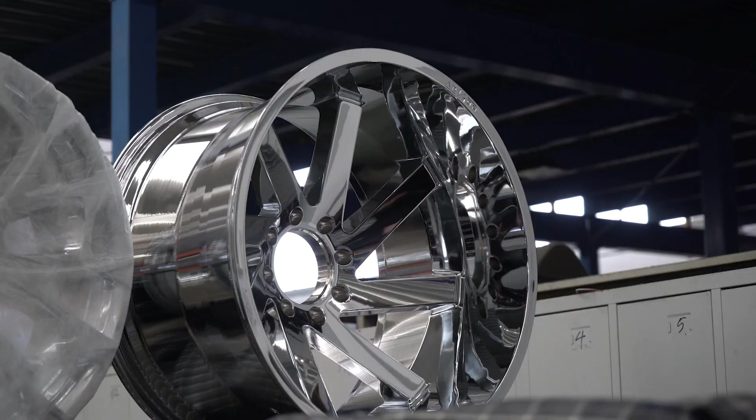My name's Sean Chartier, and I am the designer of the ARKON Lincoln.

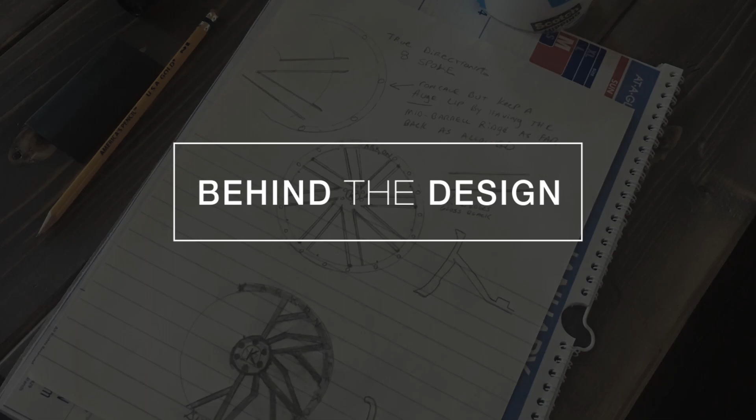Drawing wheels when I first started was a nightmare. I think I'd relate it to Homer Simpson when he drew his ideal car, because I took all the things I really loved, put them all in one thing, and looked at it and went, wow, is that a mess? I think when I stopped making it so complex and took all the things I loved in a wheel of what I wanted on my actual truck is when I was able to actually draw the clean lines of the Lincoln.

We started coming up with the concept of true directional, having them be a truly directional wheel. That's when I finally broke out of drawing like my 10-year-old son would, which is where I started, to where, as someone who's been around wheels for a decade, I was able to start creating something that people would like.

The Lincoln is built of a bunch of design components. I knew the big chunky wheels were the hottest, that people really loved the clean look, and it would match almost any kind of build. The directional was really important to me, so I wanted the directional spoke. The concavity was important to me too—I wanted that hybrid look.

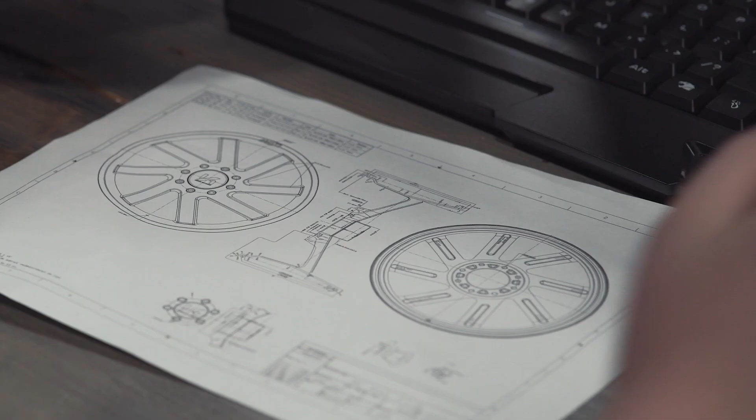But I think it all started coming together when I was able to lay it out flat, and then I did a side drawing, a side view, that gave it that bowl, that concave cup look. You can picture it in your head, but you can't get it on paper. I think that was the hardest part—taking what was in my head and actually getting it on paper. It took a lot of renditions.

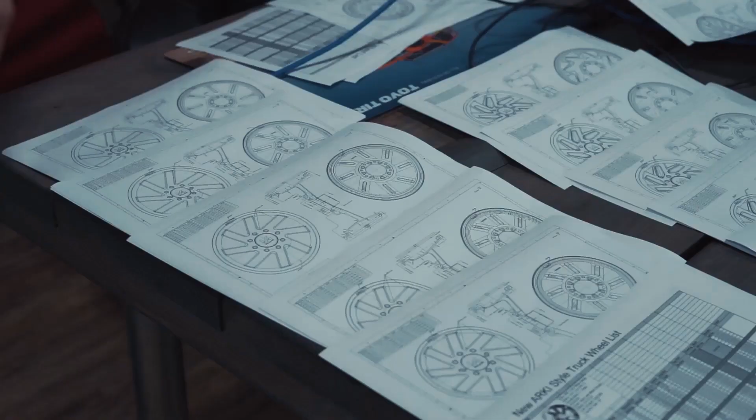I wouldn't show you my first ones, because it is really, really difficult to design wheels. The Lincoln was probably the fourth one I liked enough to send out and have 3D renders made. When the first one came back, I was like, yeah, heck yeah. And I showed it to other people, and they said, dude, that is ugly, that is the worst wheel ever.

So when this one came back, I called everybody in my office without even opening the email, because I had so much confidence in the sketch—I just had a gut feeling this one was finally going to be one to be proud of. I had everybody in my office, opened that thing up, put it on the 50-inch TV, and everybody said, yes, you hit it.

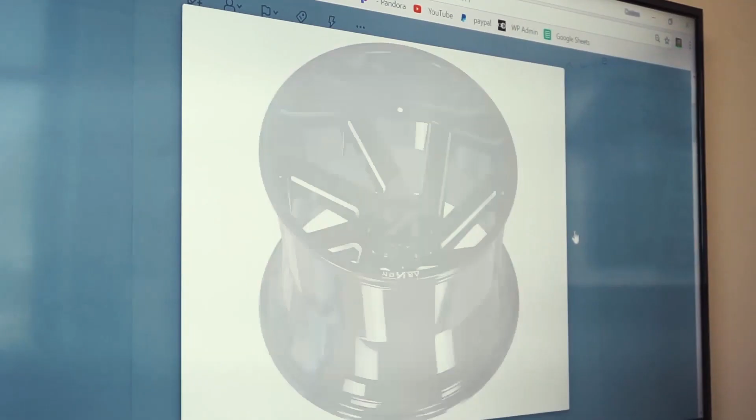When you design a wheel on a napkin, you don't have any rules to follow, so I designed it the way I wanted and sent it off. I had a little bit of concavity, but not a ton. I wanted the pass-through on the barrel so the lip looked like it went forever. When it came back, it had a ridge around the barrel, which ended the lip short—it had a step in it, and it wasn't what I wanted. So I kicked that one back and said, absolutely not, go back to the napkin drawing.

But in general, it ended up being very similar to my napkin sketch. Unfortunately, when the ARKON Lincoln came to us, the 20x10 was the first one I ever saw, and I've been running 24x14s—I'm looking at doing 26x14s. So when the 20x10 came, it kind of took some wind out of my sail. I lost a little bit of confidence in the design.

Then I saw the 26x14 in chrome. When I first laid eyes on that 2614 chrome with the huge concavity, the directional spokes, the clean barrel, the pass-through, and how wide and deep that lip was, it was absolutely love at first sight, and I knew this wheel was going to be a really big deal.

Those that know me know we've built this entire company based on one thing—I was on a mission to own a Lamborghini. When that wheel hit number one on the charts and became the top-selling wheel on Custom Offsets, it was just as good as the day that Lamborghini got delivered. It was a lifelong mission.

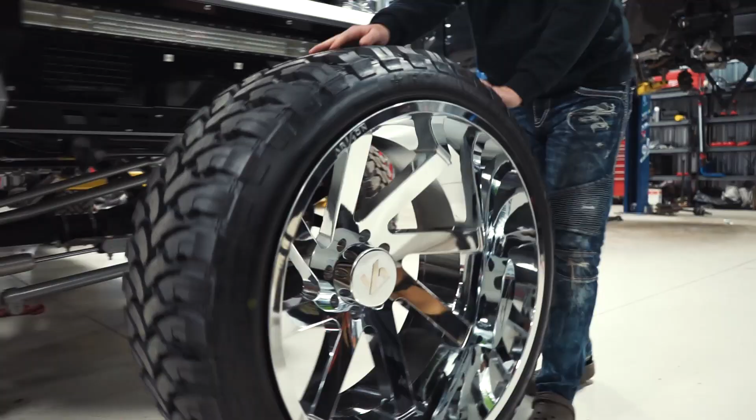It meant the absolute world to me that you guys appreciated that wheel as much as I did, and that the design that was in my head—when you guys saw it and agreed that it was a bomb diggity—that for me was like a life mission complete.